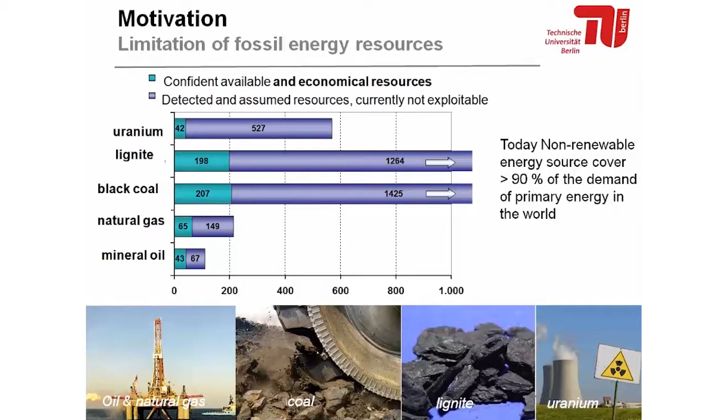So we have started here in Germany the energy change, although it's not really strongly forced by our government, but it could be. I have the newest numbers here for the electricity production.

You can see the electricity is produced mainly from lignite, although it will close up the next years. Then we have also black coal, and still we have nuclear power at 14%, and natural gas due to our former chancellor with good contracts with Russia, who built a new pipeline through the Baltic Sea, which destroys a lot of environment.

So we go up to 8%, 9%, but we already have a huge part of renewables, which form the basis for around 30% of our electrical energy.

Mostly you have seen windmills. We have windmills here in the north. That's also the challenge, to transport the electricity to the south, because most of the wind comes up here in the north. And also we have a small ratio of solar power.

Also the longest sun hours appear in the north, on the islands of Rügen or Usedom, maybe 1,000 to 2,000 hours, although one year has only 8,760 hours, and there's also night, so it's quite much sun time.

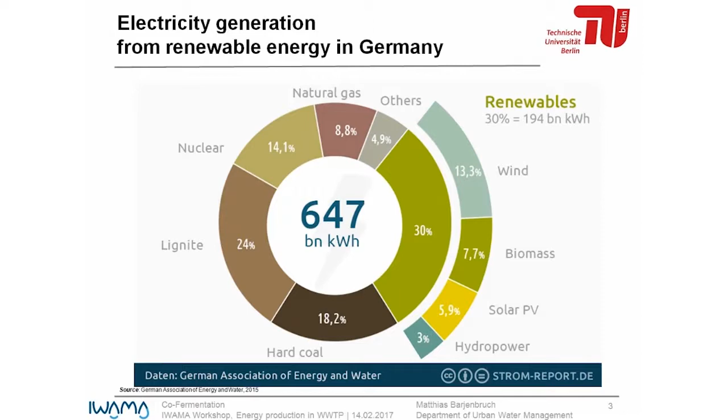There was a study made by the BWR Energy Group - it was around, so it's not correctly cited, but it was mainly Mr. Schröder and also Mr. Schmelz. We had power generation at that time of 11.5 kilowatt hours per inhabitant per year, and heat generation double that.

But there are estimated more potentials if you operate your digester in a quite efficient mode. Still some digesters have only heaters; they don't have combined heat power stations. If you build up a combined heat power station with higher efficiency, or add disintegration and better utilization of the digester, you can get...

...double values compared to the status quo. And there's also a potential if you build up smaller wastewater treatment plants, which actually have extended aeration, equipped with digesters.

But here on the last slide, we have lower CO2 emission in extended aeration - we must discuss this later. But for each case, the economic aspects must be checked.

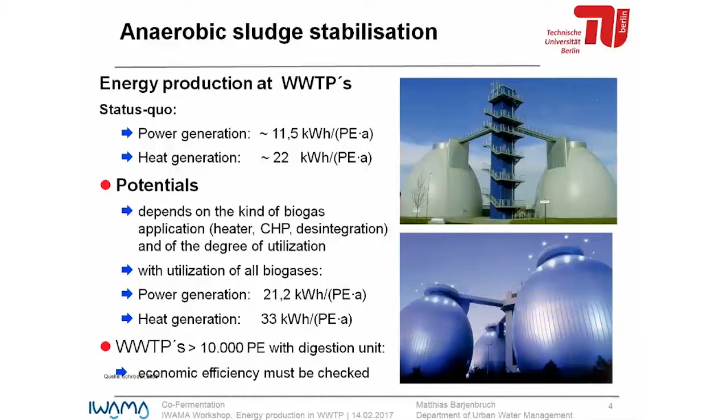So the motivation: we already had the energetic potential and the sludge today. In Germany, actually we have a decreasing amount of sludge - only 1.8 million tons of dry solids. The reduction of cost is due to the increasing production of methane, which lets us generate electric energy and heat.

But how to increase this gas production? Maybe setting up digestion also for smaller plants. I have seen plants with a capacity of 20,000 population equivalent that are equipped with a digester. So using the free capacity in digesters, maybe there is free capacity, adding co-substrates.

There was a survey done by the University of Hanover. They detected that there is a free capacity of 60 to 90% possible in digesters. But I didn't make this study on my own, so you can only trust your own values, I guess.

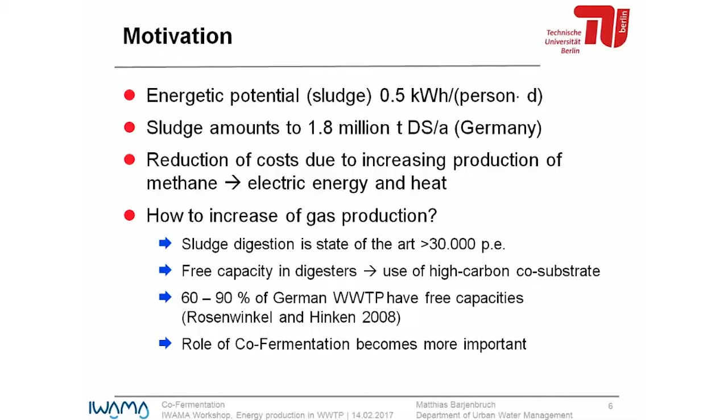I think the role of fermentation or co-fermentation becomes more and more important, but you have to look at other options. We have heard already about increased efficiency of the primary settler, maybe adding chemicals like Jörg has presented us, and also an adjusted sludge age in the activated sludge plant, which means we have the performance for nitrification and denitrification, but we don't have to prolong it to a certain extent, so we can save it.

So an optimal operation of the digester, control of the temperature, flow, mixing, and so on. Maybe also we can add disintegration - Karl will explain it later, so I don't go into the details. And so an increased digestion of the sewage sludge, adding maybe co-fermentation or combined or interconnected plants.

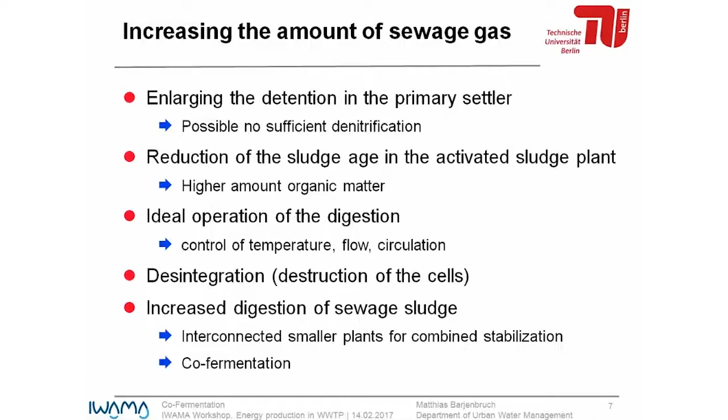So Michael Friedrich made a good study here in the region based on the economical aspects. So combined biowaste treatment, what is the advantage? Of course, I mentioned the energy change, and we have a lot of biomass and biogas plants, and they are in competition to our digesters at the municipal sludge plants.

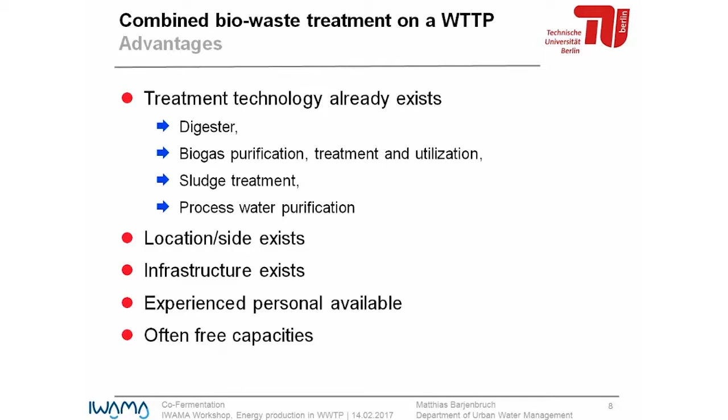But we have these digesters. They are good, elaborated. We have good experience, and we have the systems for the biogas treatment, purification and usage. Also, we have sludge treatment. We can treat the surplus water. We have experienced collaborators on the sites, and of course we have often free capacities.

But sometimes it's difficult to get the substrates because they are already under contract. So it's not so easy. I will explain later. So we have also some legal aspects.

So we have to check our water law, if the permission is according to the water law, and also the waste law in Germany. So I don't want to go into all those details, but we have to control the capacity of our treatment plant. We have to prove the efficiency of our wastewater treatment, specifically for the reject water. We mentioned this plus of nitrogen, which comes back from the supernatant of the dewatering units.

So also we have to look at the noise and odor emission. Additionally, maybe traffic also - trucks come to our plant, and also this has to be regarded. Also the hygienic aspects, depending on the substrate which you choose.

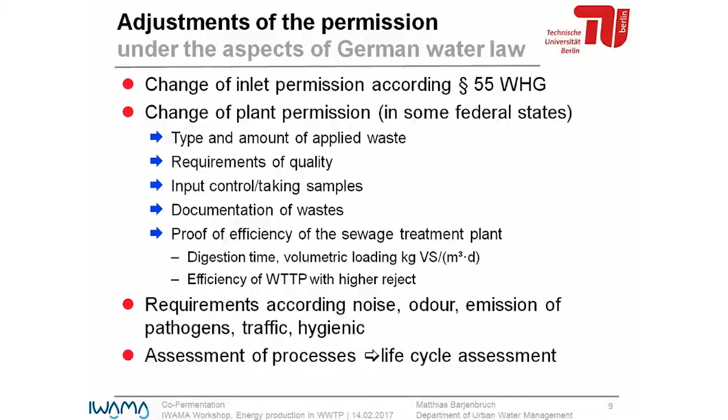Maybe I would recommend at least the screen. That's very important, we'll see later also in my example. And sometimes you can apply it directly, but this really depends on the substrate you get.

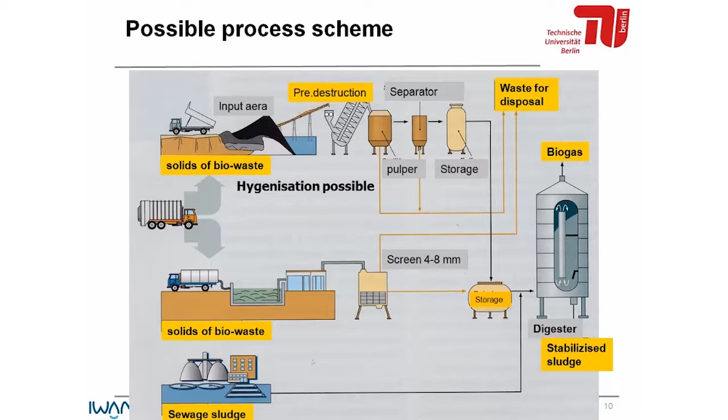So some properties you need for your co-substrate: of course it must be digestible, it must be mixable, maybe you want to pump it also, and also free of other impurities. And most important substrates you can take here from fat separators out of your region.

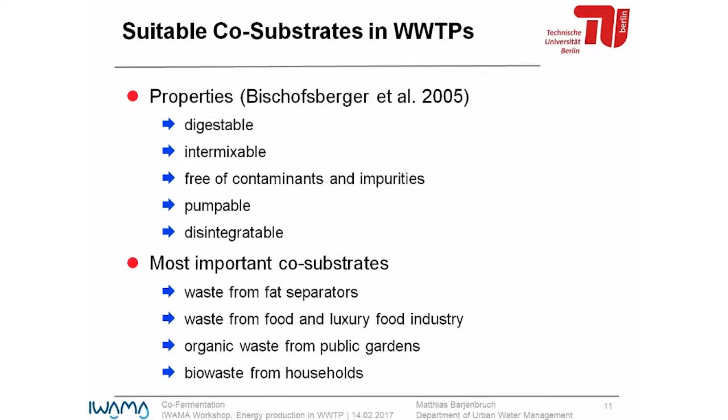So this is more or less easier also by the law to collect them, and maybe food, luxury food industry, dairies, organic waste. So I have, in the documents, a list of some co-substrates and also the yield, the gas yield you can get. You must choose a co-substrate which has a similar gas rate as the sludge, for example.

But there are still some waste things on the list - maybe, oh no, not on that list, I have another one - so which are not waste anymore. So for example, you can get whey from the dairy as a waste, but actually they sell it to you

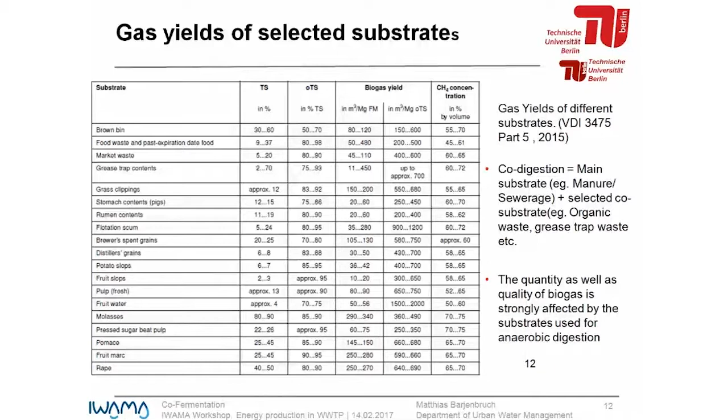as a health drink combined with fruits and so on. So it's not anymore a waste, so it's not available for you. In that case, in Berlin we had an inquiry - we wanted to start up the second largest plant equipped with co-substrates, but there was no substrate we could get.

And so they wrote to all those Döner Kebab fast food bars, 33,000 letters. We got a small response, but it was very difficult to get contracts and to collect all those kinds of fat traps. And by the way, also the Berlin Senate detected that they had no real control of those fat traps. Usually a restaurant should have one, but it wasn't controlled. So they detected some missing fat traps and also wrong operation of the fat traps.

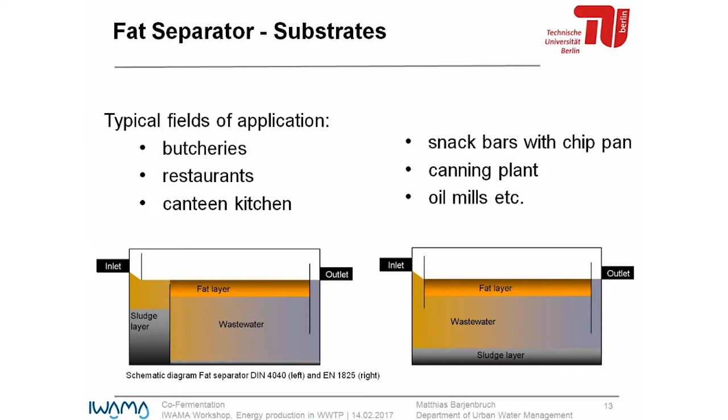Holger, I remember we did this for Rostock some years ago - we even looked at the ice cream bars and so on. But yeah, Berlin was not well equipped in that case. So, but we are well equipped with a treatment plant.

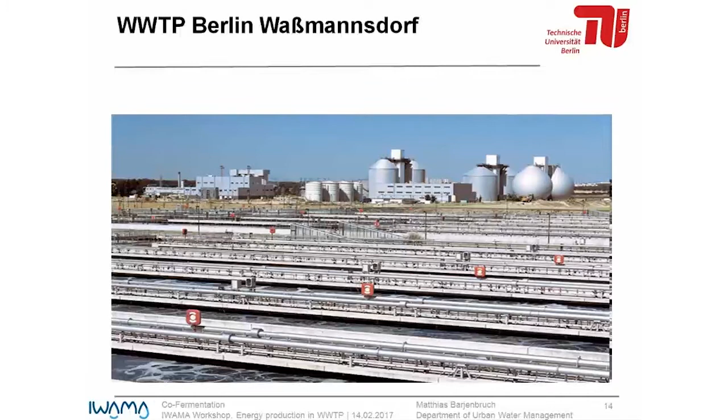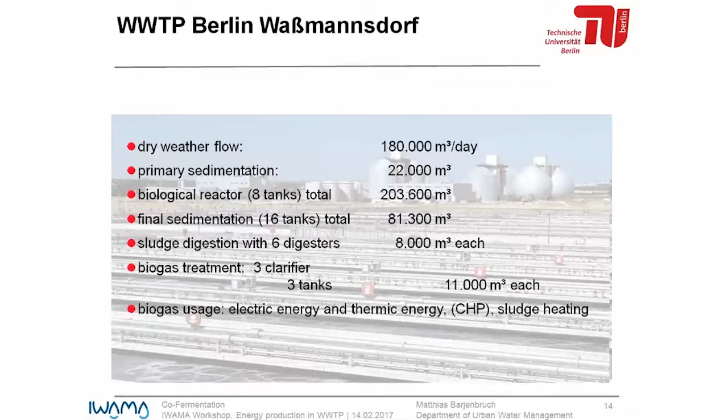So the second largest one, the newest one, Berlin-Wassmannsdorf. Around 1 million connected population equivalent. You can see here the figures. And also in the end, we have digestion, 6 digesters.

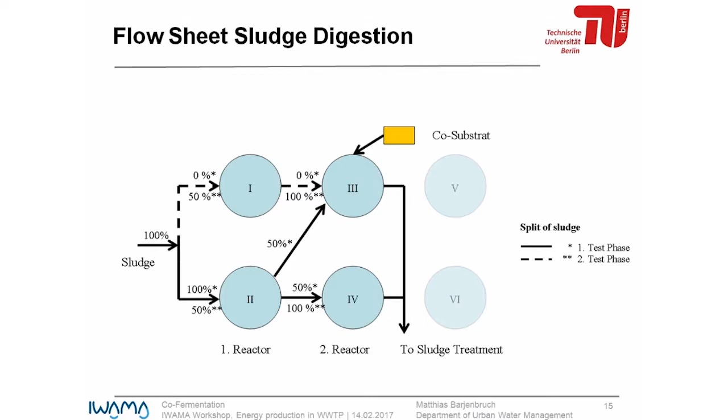We made a careful start up of this co-fermentation, and so we added co-substrate in one line, with a parallel line where we could measure the biogas production and the behavior, also the foaming and everything. You can see here the delivery station, but this was the delivery station only for the startup.

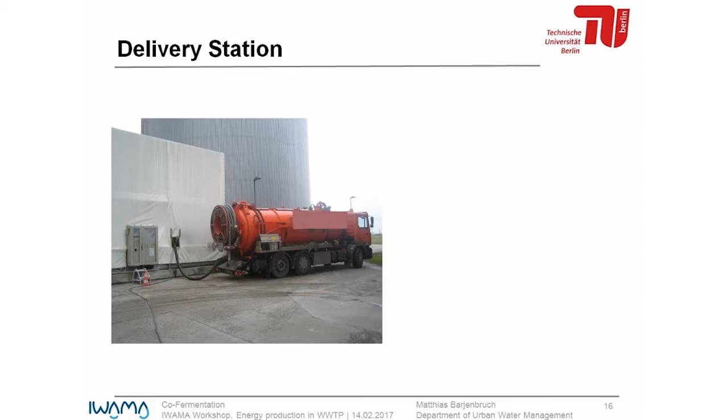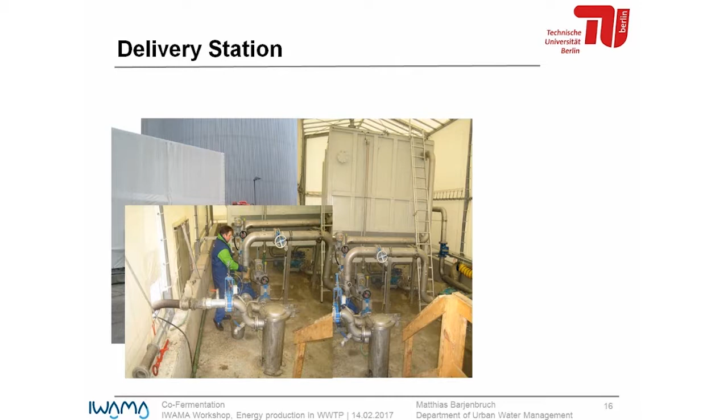Now they built a good one, a large one, or more or less a professional one. You can see here this is a storage tank, and also here we have the inlet, and a lot of handwork to do because we had to clean the screen manually. So this was the first point we changed, so there is no manual screen.

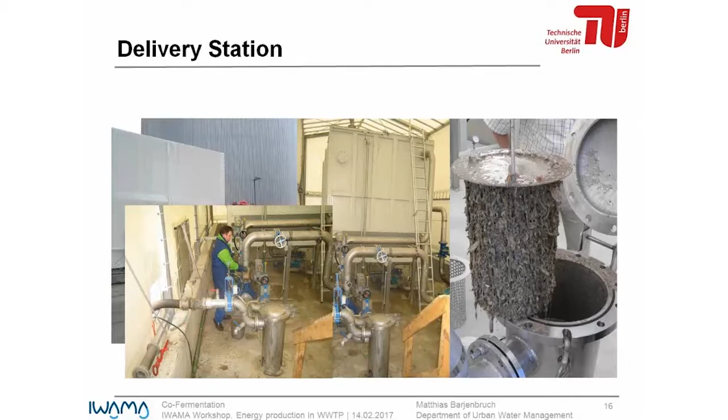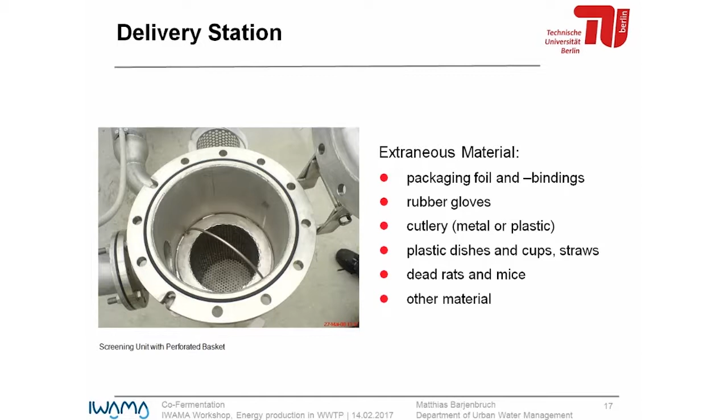Now we have an automatic screen, and you can see what can be found in these fat traps. We have packaging material, rubber gloves, forks and knives, plastic dishes, dead rats, everything we could find here. So you can see it looks like that.

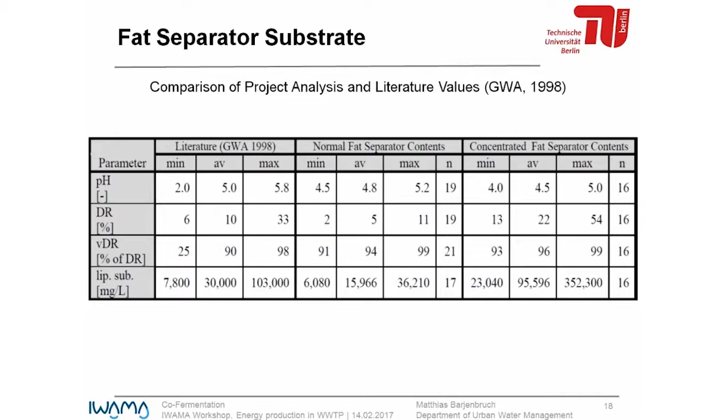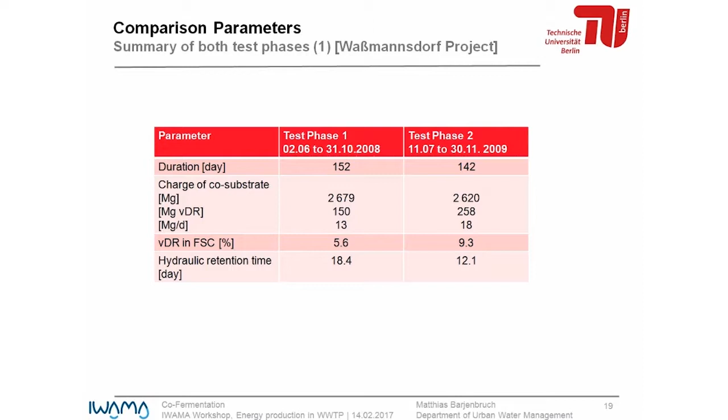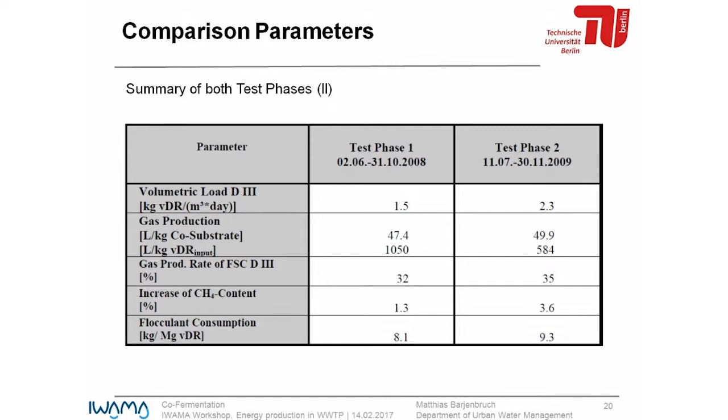So in the end, we got additional gas production in both phases. You can see additional gas production around 32%, 35%, and additional gas yield related to the volatile solids around 1,000 liters per kilogram.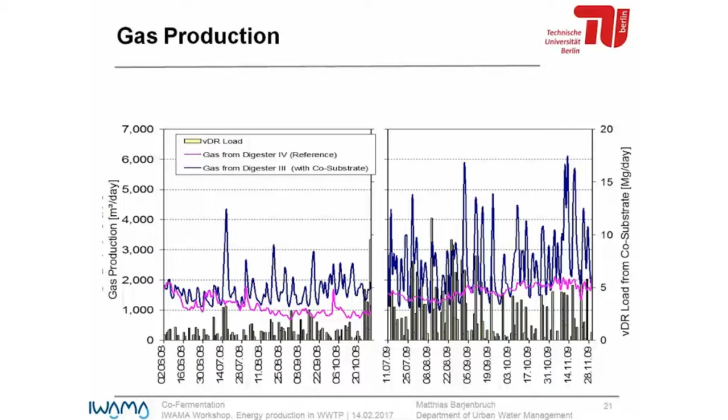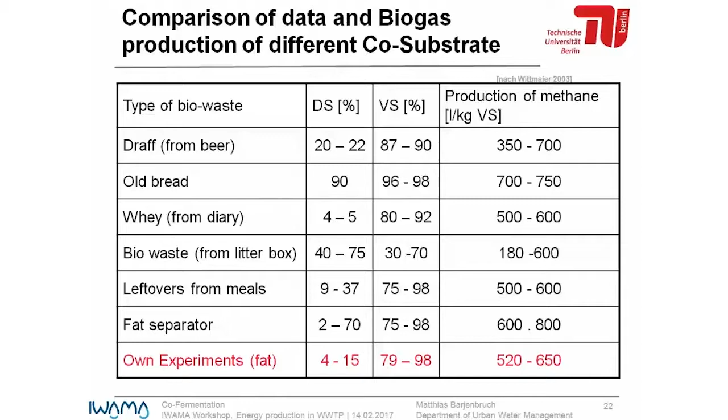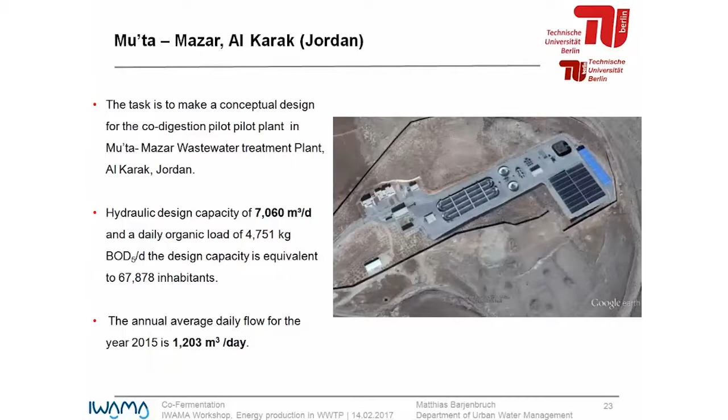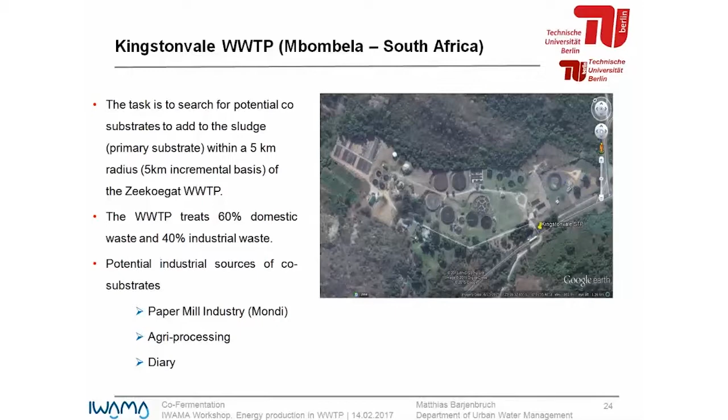So to sum up, co-fermentation offers an option for additional production of energy at wastewater treatment plants, but you have to regard several aspects. You need, of course, free digester volume. You need to check out whether the reject water can be treated in your plant, and also maybe if you have to hygienize the input. If you just use fat, it's not a problem, but if you use other substrates, you might need hygienization.

And our recommendation was, out of this experience in Berlin Wassmannsdorf, that the hydraulic retention time should be at least 20 to 25 days. And they upgraded this, and actually they have a good success with the co-fermentation. So thank you for your attention.